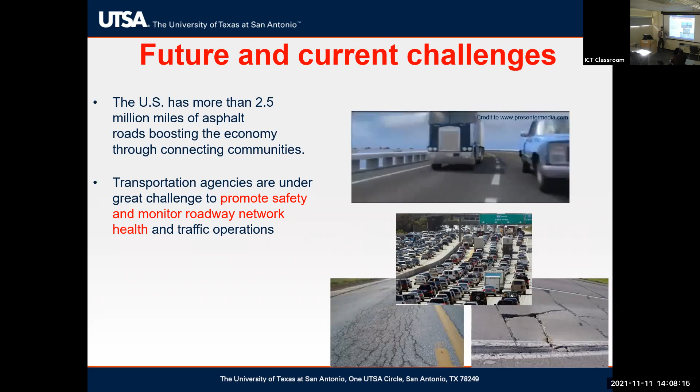So here is where I see the future coming. Pavement have always been the infrastructure to allow us to move from one point to another. Once we move, we improve ourselves, we improve the economy. At some point, we got to acknowledge that this infrastructure, somebody else is taking care of it for us, which is the DOT. So their perspective is different. Their perspective is to make sure that this infrastructure is healthy, sustainable, and continues to deliver what it's supposed to deliver. So at the same time, we want to make sure that this infrastructure can work for as long as it's being used in service.

So here, if you put together some of the challenges that we have in pavement roadways, while material is one part of it, I again looked into it from a different perspective. So you can see traffic congestion. I'm in San Antonio, I'm not surprised to see traffic problems. You're glad that you're in Champaign, you didn't see that.

Traffic and pedestrian safety - I'm engaged a lot with TxDOT safety research where we get a database of all the crashes that happen every single hour. We put it all in a database for us. We're about 600,000 crashes a year in Texas, about 10% of that in San Antonio. And we get fatalities, about 3,000 a year.

All happens on the roadways. So that's a problem. Roadways has to step in to find ways to try to avoid that somehow. Some part goes onto the driver, but again, what can we do for the pavement as well?

In urban heat islands, I'm in a city zone, so I see this problem a lot. Raise in air temperature. I talked to Dr. Jeff earlier this day, this is a problem. So we see it, there's air pollution that comes with it. We acknowledge it's in there.

What we can do about it as well. And then finally, connectivity to rural areas. I'm in urban zones, but if you look into those small towns which are not reachable to San Antonio, they don't have the same level of service that big cities have. So what could we do to connect them to it.

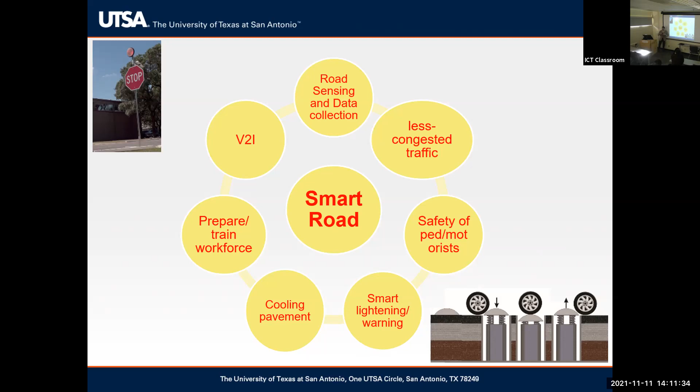And then you have to look into cooling pavement ideas. Once you get the energy out, how does that affect the energy in the pavement, smart lighting, safety of pedestrians, preparing the workforce. You guys are the next level, the next generation's workforce. You learn about these technologies, you go out, you implement it, you spread the word, it becomes our tradition or our common research later on.

So I looked into the pavement from the perspective of what we learned in school. We have thermal energy that goes into the pavement. Every day the pavement collects a lot of heat. You look at the surface, you look at the bottom layers, there is always a thermal gradient, the difference between the top and the bottom.

And that difference is about 20 degrees. You look into the records, you look into the data, you collect your data. These thermal gradients happen all the time in the pavement. I'm talking about asphalt pavement.

And then you get strain energy, loading imposed from traffic that goes into the layers. So there is some kind of deformation the pavement will collect, but there are always force deflections. This strain energy goes and gets absorbed into the pavement. So all of this together happens every single day, as far as we have traffic and as far as we have heat. And we do have both.

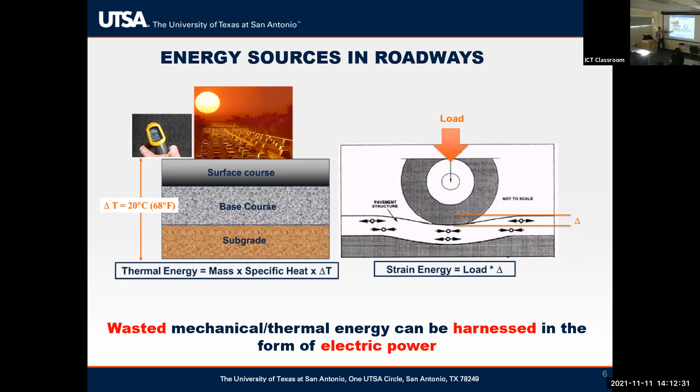So we'll try to go through some of them. I'm going to skip this one quick because we have a glitch in the videos, but here it is. The concept is we're going to build a platform, a small platform of energy harvester that allows the following.

When a vehicle drives over it, it will exert mechanical loading on those piezoelectric stacks, which we call them. Once you put them under mechanical pressure, it will generate electric voltage. And that electric voltage - from this point on I will bring in electrical expertise to help me build this - a DC-DC converter, a battery storage, a microprocessor, to take the voltage and store it.

At the same time, since I have a source of power, a stream of power coming every time I have traffic loading, it allows me to have a memory, a processor to transfer the data that comes in. What data do we have? You see it - load, vehicle, speed, direction, and count, which is what the DOT needs to assess the pavement structure.

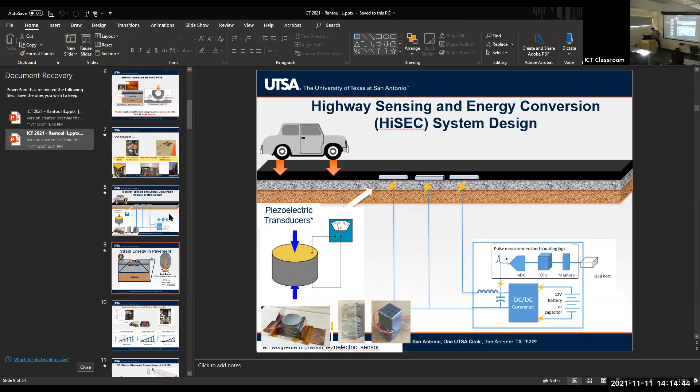Where do you put them in the pavement? No brainer - as close as possible to the surface, that's where you get the maximum stresses.

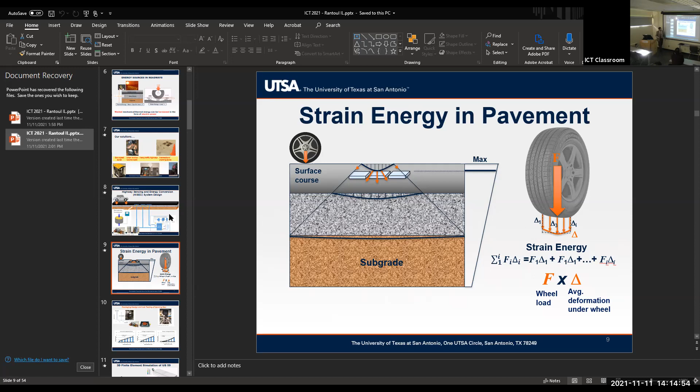So we had to learn a lot about it, and we had to test them in the lab. The traditional research idea: let's come up with a small prototype, and let's find out what is the expected output that comes with it.

So we built a stack, built a small enclosure, tested it in the UTM, the asphalt machine, a lot of you are familiar with it. We put it under different loading and checked the current, the voltage, the power. The more stress, the higher the power. So the challenge is my loading from the traffic is fixed, because we are limited with how much loading we can apply.

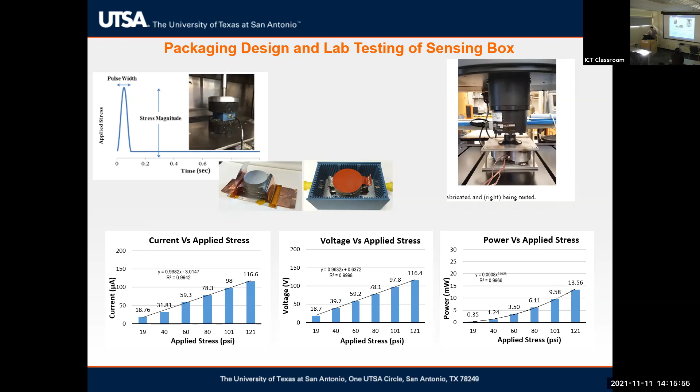But you can play with the cross section, the design, to maximize the stress and eventually maximize the power. So you can optimize based on the design of the sensor, of the piezoelectric transducer that you get. And then analysis, how much loading we get from there.

You run simulation, finite element, this is US 59 in Laredo. This is Northeast, this is a major corridor. We got A&M on board, they gave us all the layers. We checked with the 3D moving load, we load on 3D dimensions. I learned this here, so that's all done in-house.

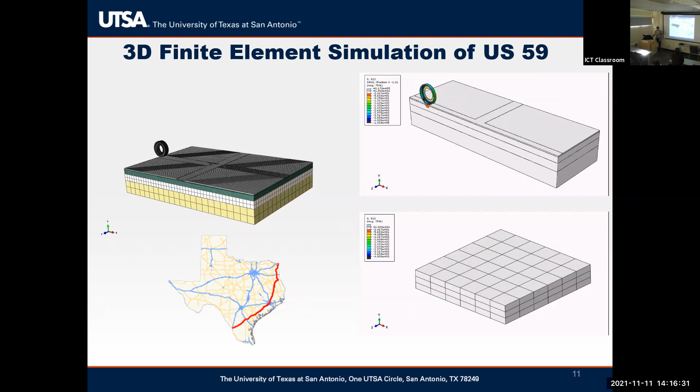So you can get the stresses over where you're going to insert the box. And here is the plan.

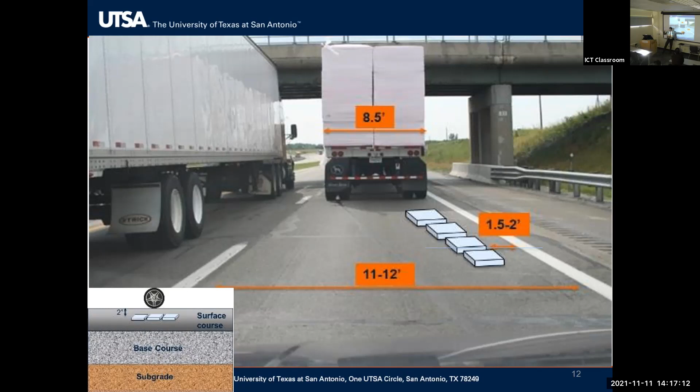I can skip this since we don't have time. You tell me by the end, if we have discussions, what is the problem with this? Okay, from a DOT perspective, leave it to the end.

So think about 2 miles, that's not much, especially if you're looking into rural areas, which is more than that. But it was a good start, at least we reached the point that we can get to 2 miles. You can always put in a SIM card, and you can get access to the data anytime, any moment.

But we said we're going to do completely self-powered, based on the power we get, how much we can instrument our system.

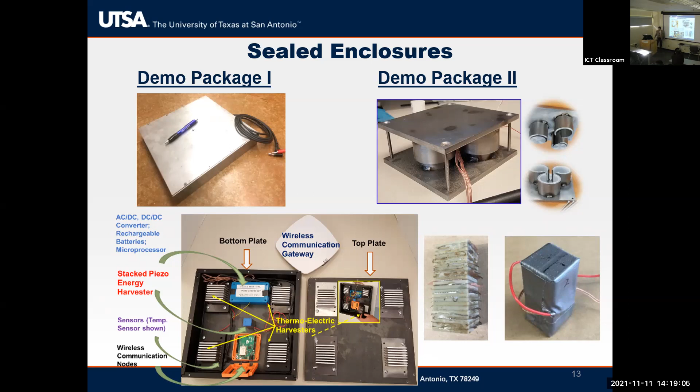Some of the applications we looked at as well: wrong way detection. This is a major problem on the highways, I would say in Texas, and we have several incidents like this every year. Not as many, which is good, because these are fatal incidents, but having those systems along the ramps, which is the entry points for wrong way driving, would trigger right away. That's a wrong way detection event that can call in a 911 call immediately. So you can pick up here one of the major problems that we have.

Eventually, this has been transformed now into an equivalent to a weigh in motion system. A weigh in motion is a commercial system that collects loads from semis or trailers, commercial vehicles. But now this is a fraction of the price, can collect much more data, and can be implemented elsewhere.

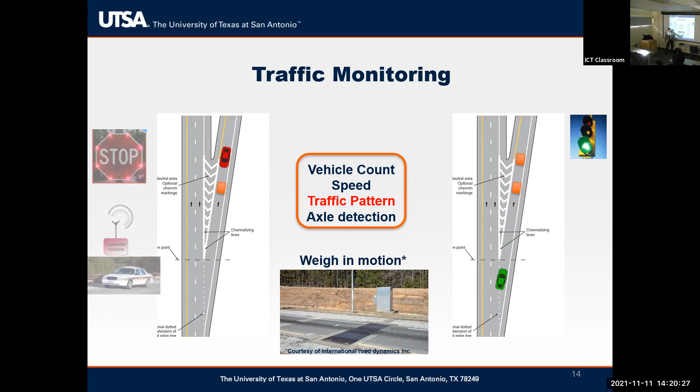It doesn't have to be connected to anything, it is self-powered, so I can completely negate the power system, and I can have data collected all the time, transferred wirelessly, and put it anywhere in the network system. So now this is another solution practically to weigh in motion, the way it is right now.

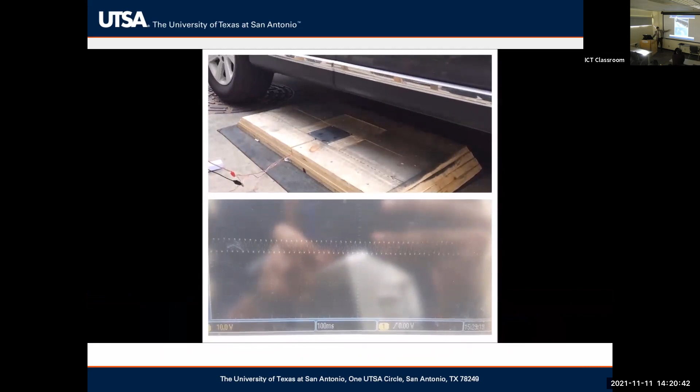So this is a small video on what we did after testing everything, having every student come with a piece of the puzzle, putting them all together and running it in the lab. So we drove over it, and then we built a small platform instead of digging in concrete. This is a 6x6 platform, and you get the power output coming from it.

Eventually, if you have an amplifier, you can now have a stream of LED lighting just from the load. So by itself, you do have enough power for LED lighting from that system. What the LED lighting is going to help with, maybe I'll show you that in the next few slides.

Other solutions came in because we have some logistic problems when we present it to the DOT, and what we're going to do about it. So we got some feedback, and then we thought about another concept, one I was motivated with from a Virginia Tech professor, I believe you invited here, to build an electromagnetic speed bump.

We had incidents of students getting killed while crossing school zones, which is not the intention because we always have the slow speed signs. So we thought, okay, let's have a speed bump that you drive over and it can move with you. The purpose of the speed bump is it's above the surface, so any driver coming in has to slow down. So the concept of forced slowing down in drivers will be taken care of.

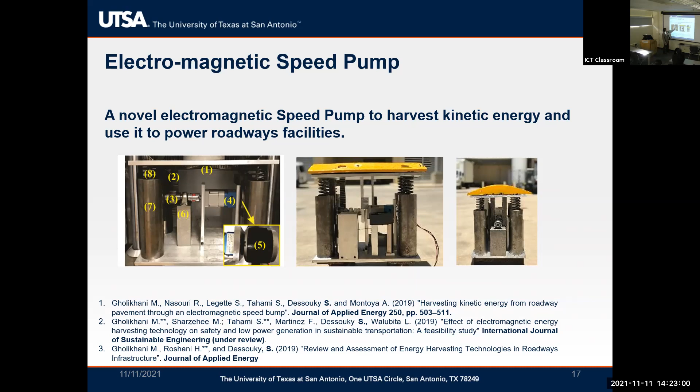By the way, this is all done by a PhD in civil, no background in mechanical, completely. So there are no barriers for us, by the way, there's no barriers. Pistons, springs to support, to retract it again, motor, gearbox, and clutch. So you can see how it works.

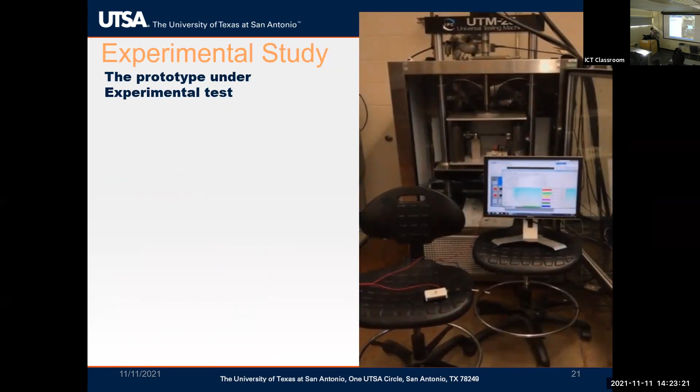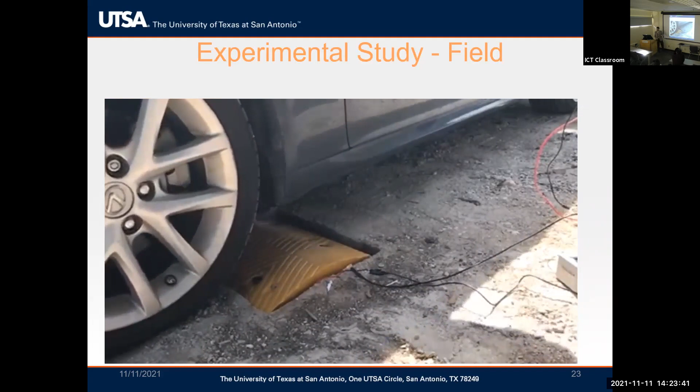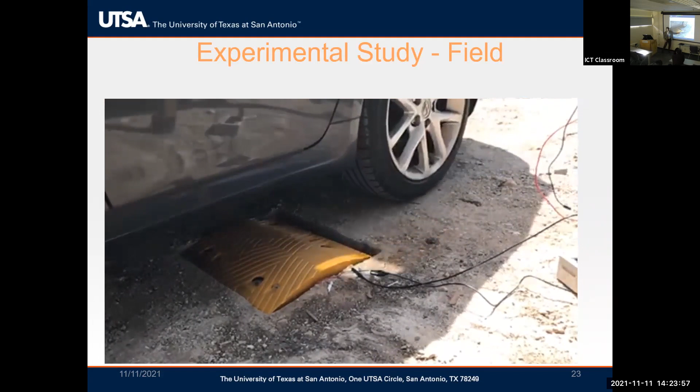So this is still a speed bump. You can lift it up. It is above the surface, but when you drive, it moves down. So eventually we expect that when a driver is coming in and sees the yellow rubber above the surface, they will slow down. So it is still a speed bump. At the same time, you still can drive at a slower speed, but I'm going to take advantage of you driving over it to push the mechanical system down, and I'm going to get the power out from it. I use that power for applications.

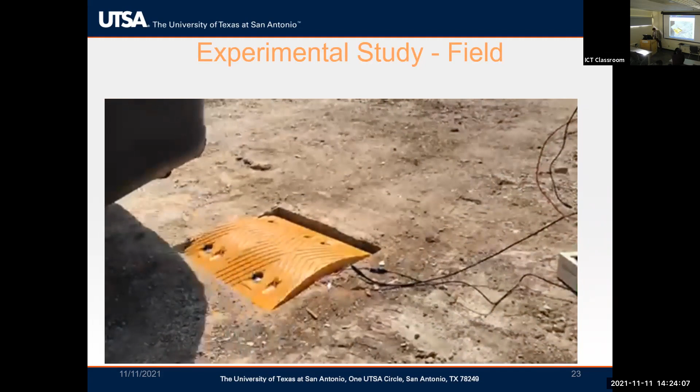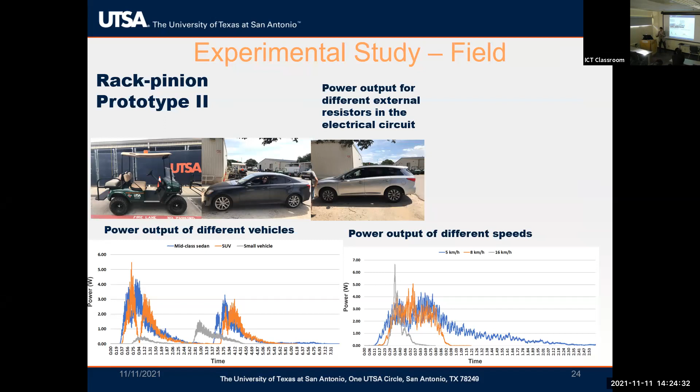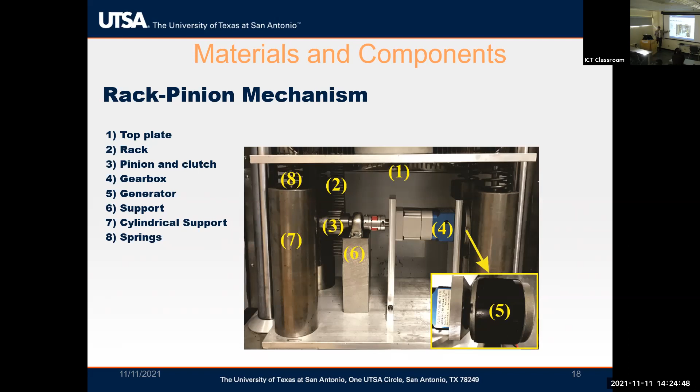So we drove several vehicles, and here's the power output we got. Depends on the component, which we optimized several times. You can get every pass to get you about 4 to 6 watts. This is 1,000 times more than what we got from piezoelectric. And again, you can always play with the components that you have in the speed bump, which are these. Always play with it, optimize it to see how you maximize the power. It's all about how much power you can get with how much price you use to build that system.

Applications: school zones, slow speed areas, residential areas, with the expectation of instead of the regular speed bump, it's electromagnetic. I wouldn't say smart speed bump, just electromagnetic that helps produce power. You can connect to flashing beacons later on. You can build in detections that can open up flashing beacons ahead of time for the driver to slow down, but you have a source of power from you driving on the pavement.

As simple as that. There could be some logistic problems. Can I just bring this down? I don't want to have it function. We can lock it in so it becomes flat with the surface, so you can drive without having to slow down. So you can always play with it.

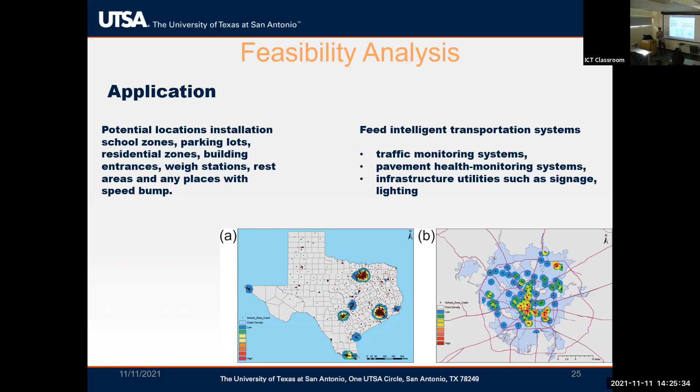And then we came to the concept of thermal energy harvesting. Some of the logistic problems were that nobody wanted to mess with the pavement, and really having to play within the lane mile is not acceptable by a lot of DOTs. So you really have to look into another concept, how to avoid the lane mile and work elsewhere. So this is the other concept, the thermal energy. Whether you are in a hot climate or cold climate, apparently you still have a thermal gradient. This could be Champaign, this is San Antonio, you still have that thermal gradient all day long.

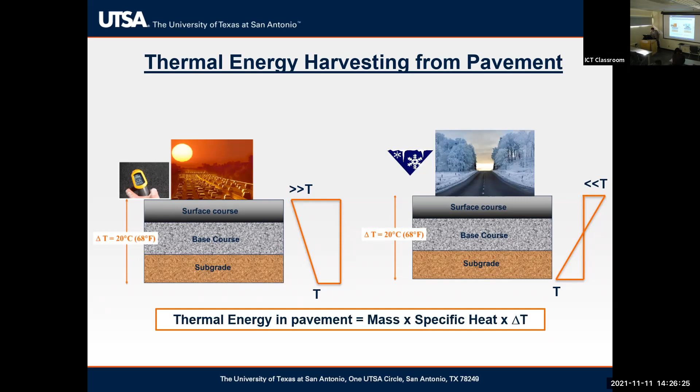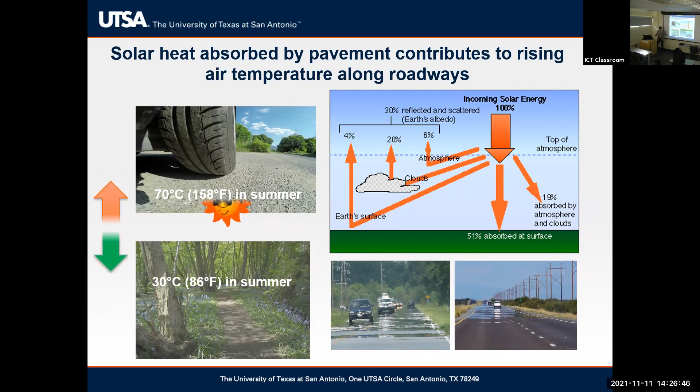So we thought about this because the natural landscape has changed from green to pavement. You have about a 70 degree rise in the surface temperature, which contributes to the heat island effect. This is common in Texas roads if you drive in the heat, so I know I have that thermal gradient all year long.

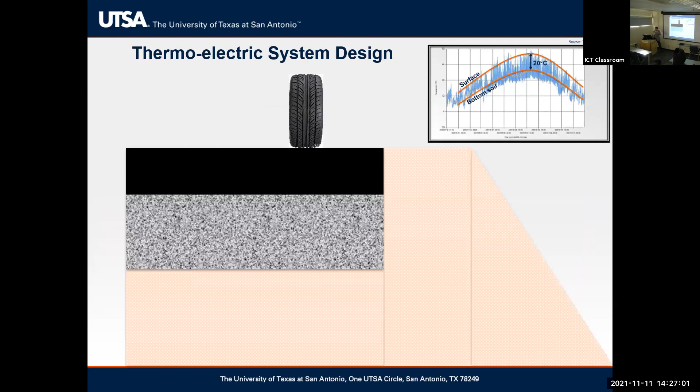This is a Houston road, and a difference of 20 degrees. So let's come up with this concept. I'm gonna open this up. Okay, I know this is hot here on the top, and it is colder down here. So I'm going to build a thermal conductor to transfer the heat from the top to the bottom.

And that's for the purpose of integrating what we call TEG, thermoelectric generator, which is right here. For those on Zoom, it is right here. This thermoelectric generator has a very good advantage for us. When you have a difference in temperature from one side to the other, top side to the bottom, it allows you to create electric voltage from it. It's a thermal element that works that way. A heat from top, a cold from the bottom, the difference in that temperature allows you to create electric voltage.

So again, that's another source of power that can be implemented on the shoulder side. I don't need to have any loading, forget about the tire, take care of that sensor, take it out. All it does is transfer the heat from top down to that. I'm gonna put a heat sink to maintain the cold side all day, and that difference is gonna allow me to produce the same power I got from the piezoelectric. But now, no loading needed, just from the thermal heat.

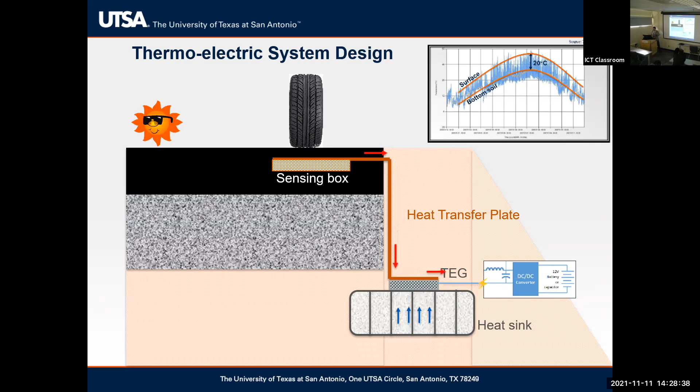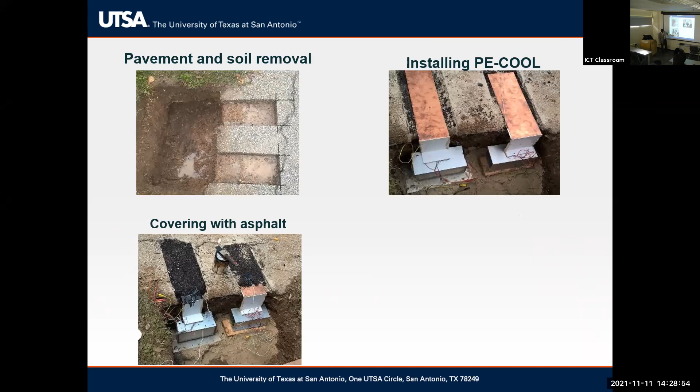So that works, should work, because again, I'm not gonna mess with the lane mile. I can put this on the edge of the road. So we went to cut, we introduced an L-shaped, this is a Z-shaped design. We cut it down, we built our prototype, we cut it, we painted it, we covered it, we let it work, and here is the output.

So now I have twice what I got from the piezoelectric. Still milliwatts, but the milliwatts for us is a lot of advantage because it allows us to run sensors and LED lighting. At this stage, that's good enough, I don't need more. This is all new technology. We don't know how much power we're getting, but at least we get some power that can help with some applications.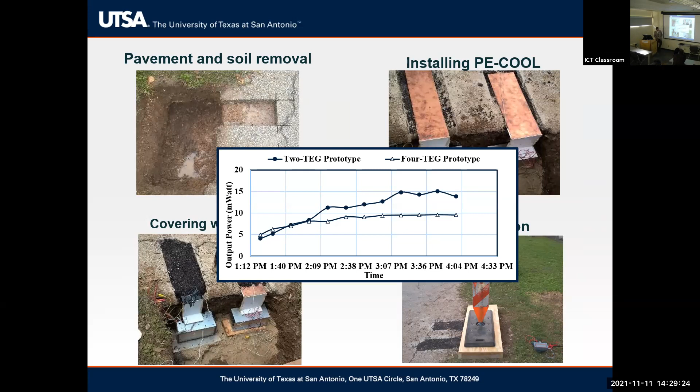So here is the concept. We're going to make this along the shoulder. It's going to continue to produce power all day long, as far as I have thermal gradient, and no matter what you do, this is going to work daytime mostly and some nighttime.

So we've been advancing the insulation box. We reduced the size, we put our TEG on one side, we backed it up very well with some NASA materials called PCM to preserve the heat. So we maintain the temperature on one side all day long, no matter what happened to the soil, and the heat source keeps going up over the day. So we always have the gradient, and we always have the stream of power.

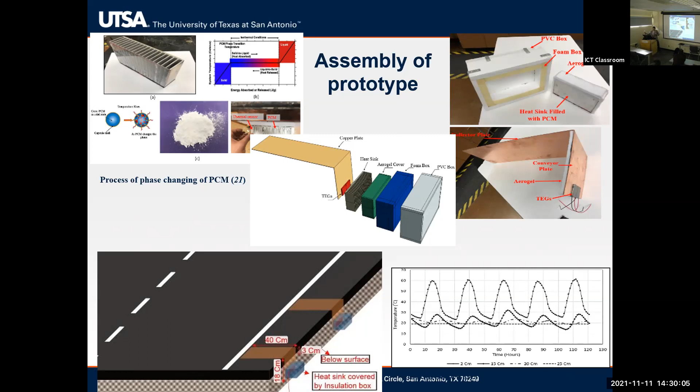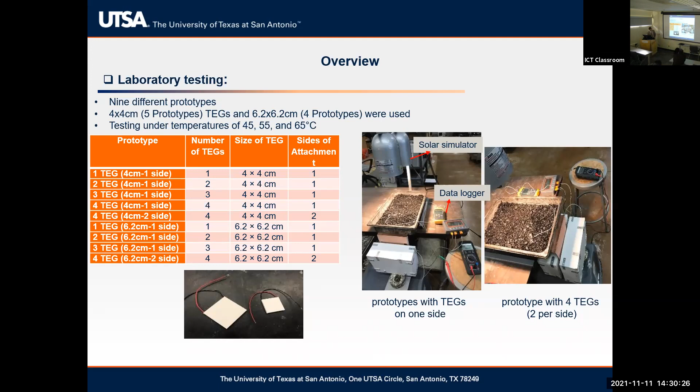We build it in the lab. So instead of me waiting outside and having the system installed, we control the light to control the heat. And then we have several prototypes of the TEGs. We try different sizes to see which one's going to work better. We play with the sizes of the copper plates, the best conductive material we can get.

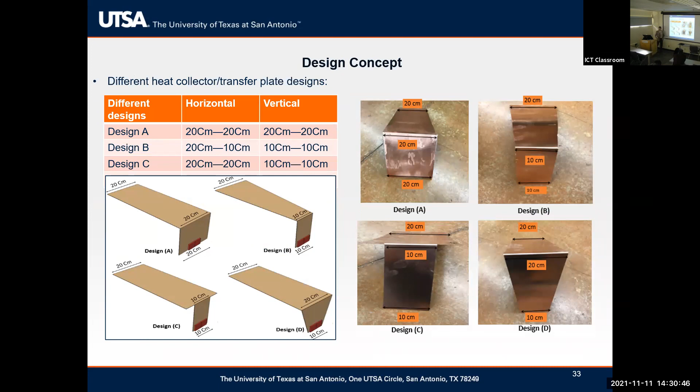And we always look into alternative materials. If you know better, go ahead and try. If you read the papers, we try different dimensions, different materials, but there is always room open for more advancements. We tried it out, and the same LED source of light would come on, just from the heat. If it's able to light an LED, it will activate sensors at any time, because these are very low watt applications.

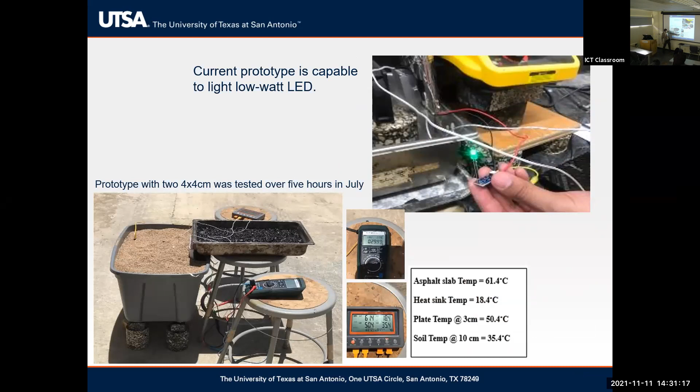So this is again soil, pavement. Our design is inserted, so you can collect the power. The gradient is maintained, the power is collected.

Here's the applications: minimum LED lighting for our stop signs, self-powered from the pavement, no need for solar panels, no need to connect it to the power grid. Rural applications don't have any of that. Yes, solar panels would work better, I agree. I'm far away from the technology of solar panels, I'm still here. Solar panels have been developed over the years, but I'm talking about an existing platform that can produce the power by itself, connected to those LED applications, and you have this light can come up at any time.

How does that help in safety? Imagine a dark sign, a flashing sign. I drive a lot in South Texas and I see areas that have nothing. So if I have this, I will definitely stop. I missed a lot of stop signs, by the way.

Motivation came from some solar roadway projects I've seen, read about, and visited in France, Netherlands, and China. I admire the concept of having full applications of solar roadways. I guess this is the future, and if we just keep waiting for things like this to happen, they won't. Somebody has to go and try.

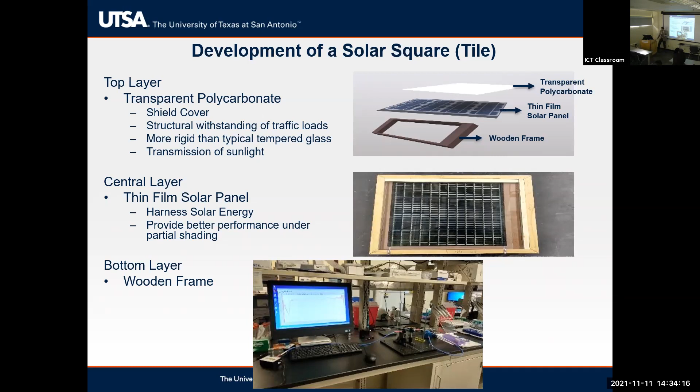So we ran transmission tests to find the best sheet to use. We went out on campus to test them out. This is a built technology, the solar thin film, so the power is already there.

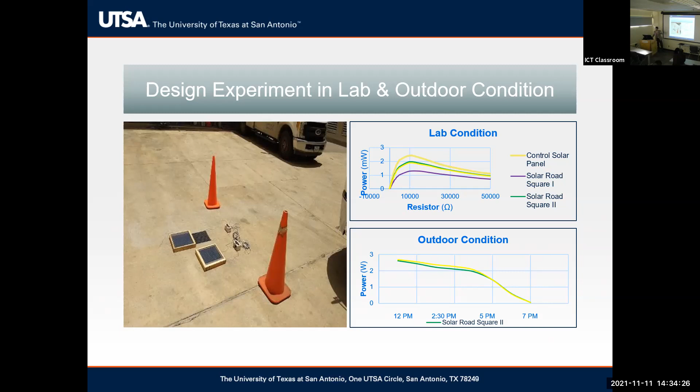Then we tested it under a vehicle, driving back and forth to see how long it would hold up. It really stands up to good numbers of traffic loads, so the problem of cracking isn't going to happen.

But the other problem is losing transmission ability, because it gets dirty over time. So we took this — you can see this is the power, depending on the quality of thin film you get, and this is when you drive the vehicle.

I don't use this because I'm expecting you have it here, but you see my fingers, right?

Transparency test: some of the glass didn't do well after a couple of tests, some did very well — 83%, 81% after running the field test, still very good transmission. So that filtered out which was the best glass compared to the others.

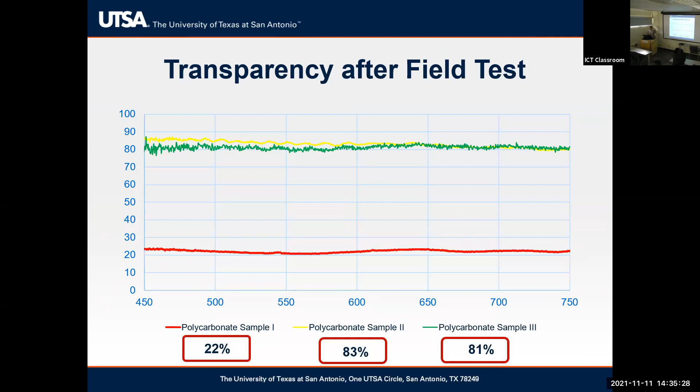So: applications, problems, solutions. Okay.

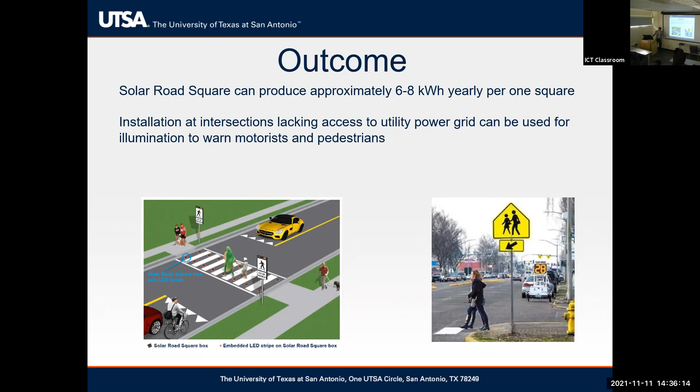And then the final one — the final one was this 4-leg stop sign intersection in Texas. You see nobody, you see the lights, flashing beacons, solar panel.

So first solution, you know the flashing beacon, right? A solar panel here to flash the LED. We get a lot of intersections that don't have mitigations yet.

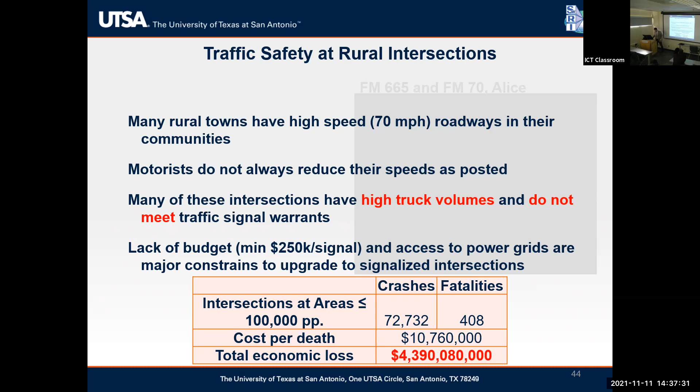So what we thought is this, a solution: thermal detection that can be on any sign. You have a thermal camera, infrared, that can detect moving vehicles. This is noninvasive. Once the vehicle drives, there is heat at the tires and heat at the engine, so the thermal camera detects that, including the size, speed, and direction of the vehicle, so you can separate two directions.

At the same time, we have an algorithm with digitization, so every pixel you see in this picture is digitized with the temperature. When the vehicle comes in, you can detect the temperature change, the size, the speed, and the direction, all with machine learning principles, done on a small app on your phone.

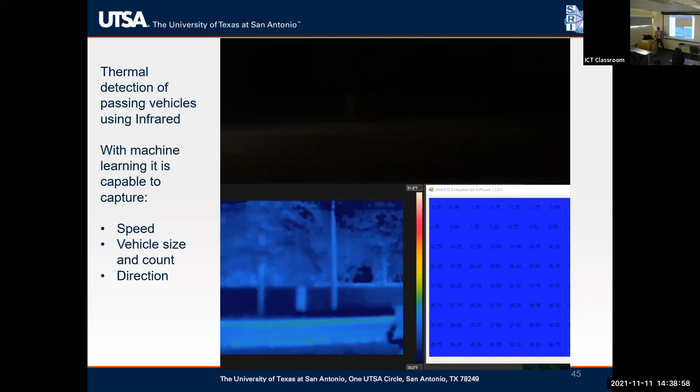So we had two students. One focused on testing the camera, and one built the machine learning on the phone. This is two students' projects, two theses. Here is the application.

Any stop sign, if you look at the traffic management MUTCD, before the stop sign there is a warning sign ahead of it, 200 to 300 feet ahead. So we expect to do the following: put the sensor of the camera right here.

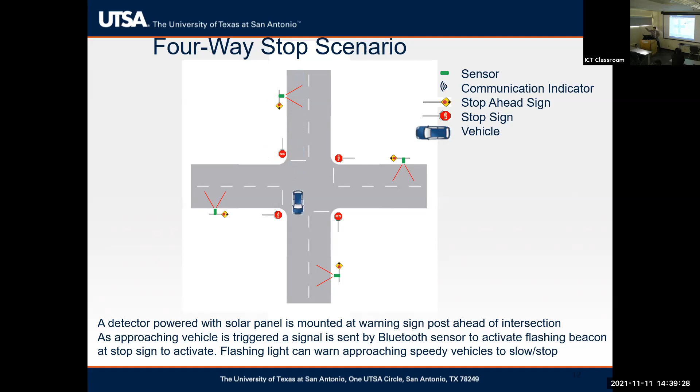Once the vehicle comes in, it will be detected. A Bluetooth signal is going to trigger flashing beacons on the stop sign ahead. So I want to show you: here is the vehicle. That's where we put the detector. A Bluetooth sends the signal to these flashing beacons. Assume no lights, by the way.

I'm cheating, but this is the camera. The vehicle will come in from here, will be detected, and it's going to send a Bluetooth signal to trigger the flashing beacons. So a regular stop sign now is going to flash only when a vehicle comes in, not all day, only when a vehicle comes in.

So a driver like me, who has missed a lot of stop signs, if I see something flashing while I'm driving, I'll probably slow down and stop. I'd say that about myself, since we ran several test cycles with slow vehicles and high-speed vehicles. We tried every concept at night too, and that opened up a lot of other applications.

Detection of pedestrians on campus: we use the same concept. We hang it on one of the light poles and we're able to count pedestrians on campus. Same concept, human beings moving, detect the heat. We also use that for railway applications, but I didn't have the chance to present it here because I don't have the time.

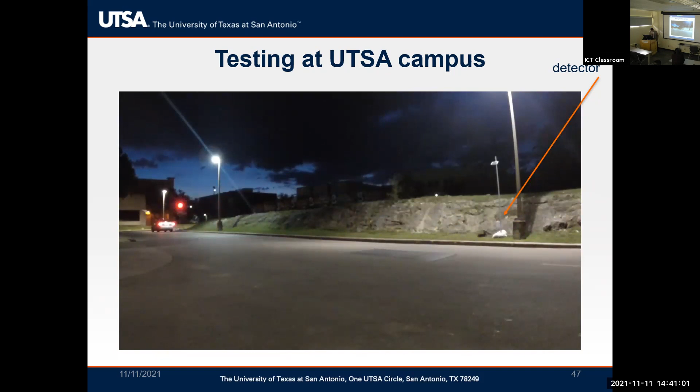Okay, so this is really the output. We came up with problems, we put together the plan with the students, we made a focus group. Every student does one thing, and that's his or her thesis. Then we put things together, tested them in the lab, took them to the field to try them out, and then we have solutions. We expect this solution will have applications that improve over time.

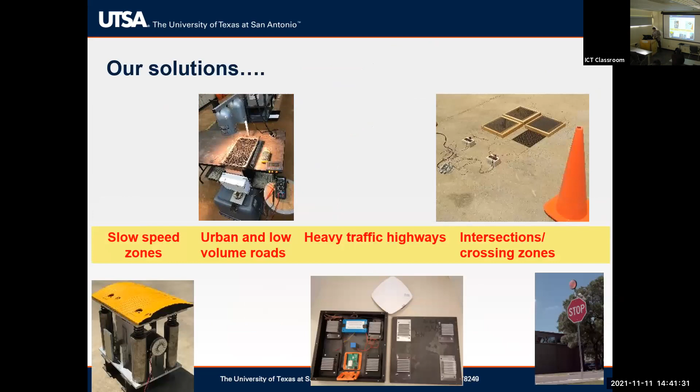So for the urban heat island, my goal was that once I suck heat from the pavement, I'm expecting to lower the surface temperature by 1 to 2 degrees. We had a mechanical engineer do finite element analysis on this, and yes, we found a reduction of a fraction of a degree on the top surface because you're sucking the heat down, transferring the heat from the top down. So what happened to the surface? It gets less, but we still need to look further.

Does it really hit and lower the temperature where you install your copper plates? What happens to the nearby areas? So scalability is key, and how we expand this. I'm still looking into the material I can spread out in the pavement to collect the heat.

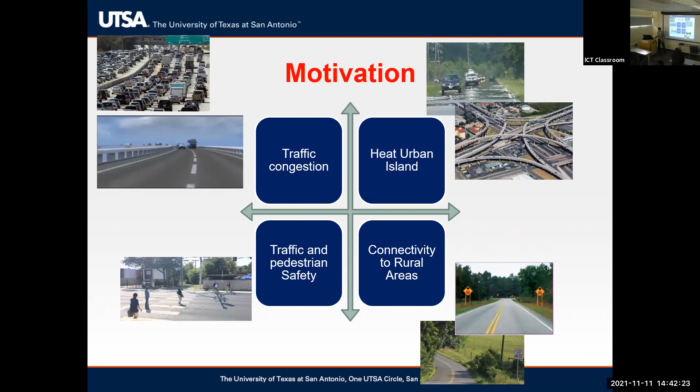Trying to be on time, so I'm done. Thank you.

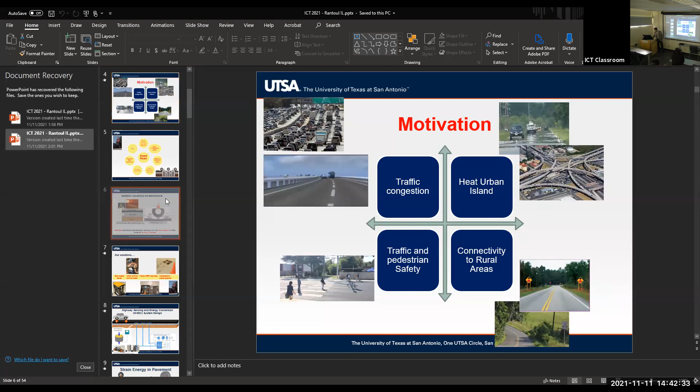It's 35 minutes, but I can go to 42. Yes, please. Thank you for the nice presentation, really strong work by your team and your students.

Curious about the camera, is it being powered by a harvester? That's another thing we tried, a different concept. Instead of complicating things for ourselves, we used a solar panel to power it. But we proved the concept, and now we're able to integrate thermal energy into this camera, so I can eliminate the solar panel.

So either you try a lot of new ideas all the time and figure out whether they work, or you try one concept, take advantage of whatever is available, and prove the concept. When it works, you go back and try to make optimizations. So now we can cut the solar panel and put in the thermal harvester.

The stop sign has been having a lot of interest, so we patented this, and then Siemens bought the license, and now we are in the position of marketing it out. But since they bought the license, they will take care of it from now. We got two other patents on some of the devices that we did.

The piezoelectric becomes a weigh-in-motion now. So we patent this to become a weigh-in-motion alternative to expand it to the roadway network instead of having only commercial ones.

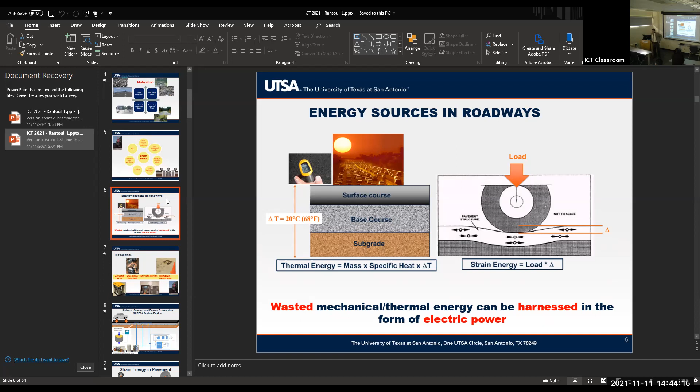Thank you for the very nice presentation, Professor. Amazing work. I have a question about the fatigue life of the piezoelectric transducer. Does it really present a problem when they are worn out? Is it a problem to change them in the pavement?

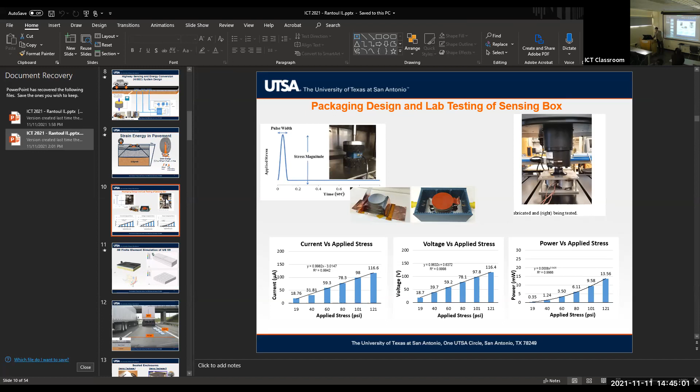We test this 200,000 cycles, and we could test it even further. We found no degradability or fatigue in those. They are very stiff, very solid, and they can stay as long as you keep them stacked vertical, no bending. That's why we built a sealed enclosure to maintain them completely vertical the whole time, and protected from water infiltration with a seal here and a seal enclosed. It's going to continue to produce power for unlimited time, because the testing we've done ourselves in the electric groups has been proving that this can continue to function without the need to replace them.

I'm not worried about the piezoelectric in a system like this. I'm worried about the battery that I need to replace every once in a while, and the sensors that can eventually get worn out because of the exposure to heat all day long. Although they've advanced the sensors from the electric group, they say they have advanced sensors now, and they make them too small. They made very small robots and they got a patent on it actually. So this is never a problem with the sensors, but it's the battery.

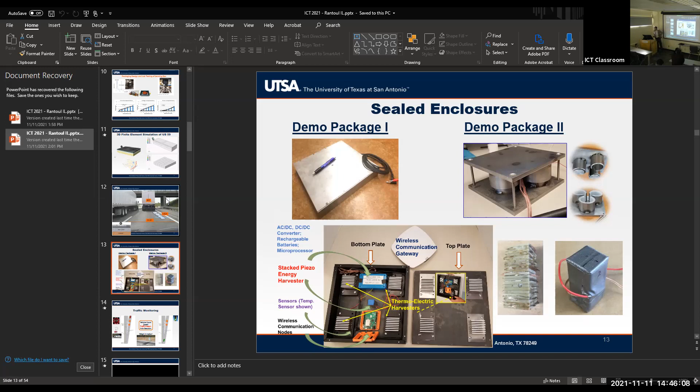Thank you, Professor, for the presentation. I just have a quick question about the actuated stop sign you showed at the end. I was wondering, how would the performance change with electric vehicles? Because as you showed in the video, most of those cars were internal combustion engines.

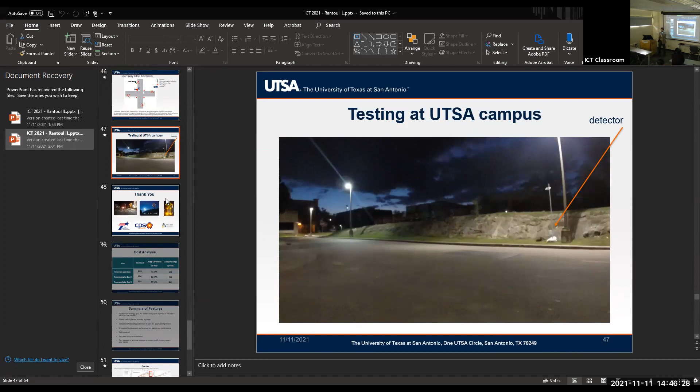The heat, right? Yep, that's a good point. The heat comes from two sources, from the engine and tire-pavement interactions. So if I'm not detecting the engine, which is the motor, I will detect the heat from the pavement interaction, which still can be there. How do you separate the pavement temperature? That's why with the algorithm you can always put a threshold on the temperature. You separate the pavement temperature, because it's always high, from the heat that generates about the tire and the pavement. You can always detect the heat from the top of the tire, so it's always going to be there.

Just a quick follow-up question. You're thinking about tomorrow. When we think about this, we think about the Ford F-150, very common.

Why did you not decide to go with the sound of an approaching vehicle? That's a good idea, really a good idea, you can try. I thought about two things: heat and loading. The door is open to try a lot of ideas. The wind, the sound, that's another idea.

What sensors and cameras are available in the market to allow you to prove the concept first? If not, then you produce that first. I know we have an infrared camera that can detect the heat, and we take advantage of it to have an application. But if there is a camera or sensor for it, go ahead, and when you do it, we'll learn.

Thanks, this was really nice work and really interesting. My question is about the stop sign. Maybe because I haven't driven in Texas for a few years, I forgot how crazy people drive there. But I'm wondering why you don't just always have it flashing? If you can harvest a combination of solar energy and thermal energy from tire-pavement interaction, why does it need a camera sensing that there's a vehicle approaching if it could just flash all the time?

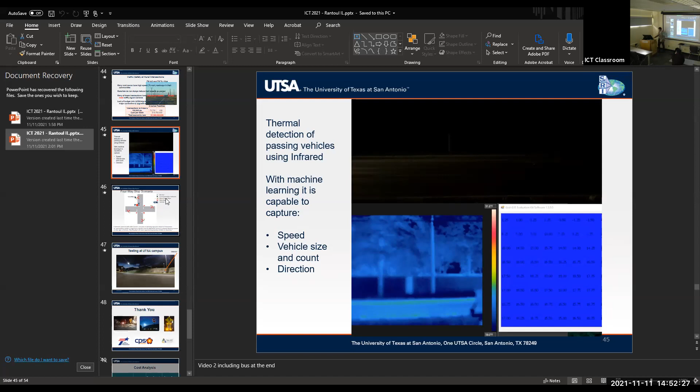Yes, we work on pavement instrumentation, the wires work perfectly, but I want to minimize the problem that DOT always has, minimize the interference with pavement as much as possible. Okay, so wires, I take them out. Now I have a system, okay, I don't want to put it underground. I asked the same question when I thought about why. What is the first comment I got from TxDOT when they saw something like that? You think about it and let me know. And we're all pavement engineers here.

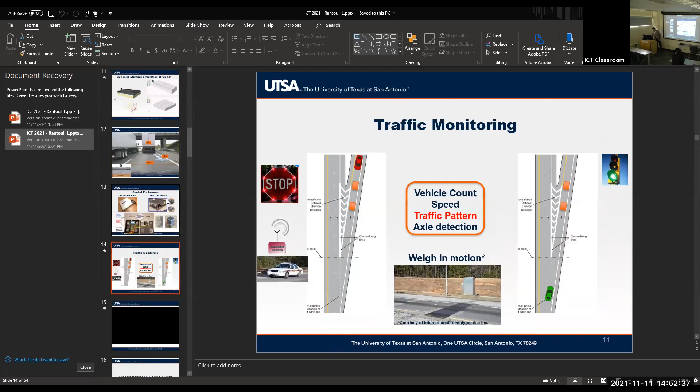You think about it and let me know. You should figure it out right away. Once they saw this, they dropped the ball, but they dropped the ball for us, and it allowed us to change our concept and our applications. It was really shocking after two years of work, but it allowed us to change the way we look at this from their perspective. And that's why communication is key. Always work with your clients to see what they exactly do along the way, not surprise them with a product at the finish line. Communication.